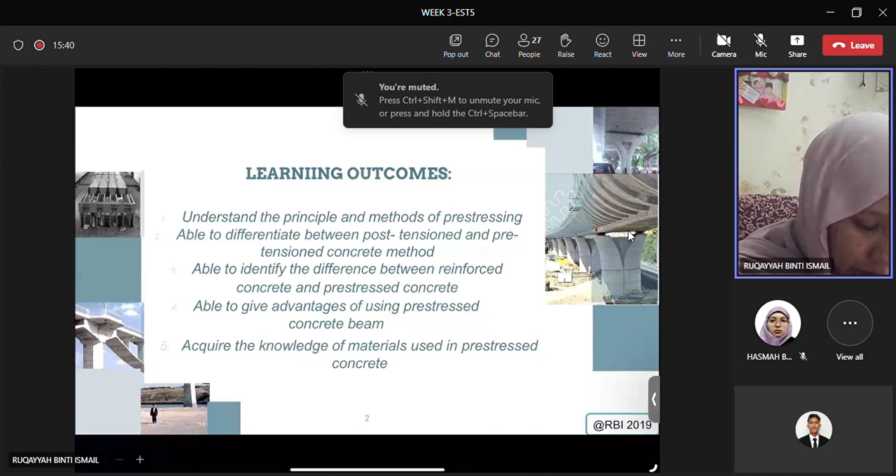And fifth, acquire the knowledge of materials used in prestressed concrete. Okay, so just a word of wisdom today: the first step in knowledge is to listen, then to be quiet and attentive, then to preserve it, then to put it into practice, and then to spread it. This is by Sufyan Ibn Uyainah. You can take that down as notes.

So first we start with what is prestressing. When we talk about what is prestressing, we go to the word stress. Stress is equal to P over A, where P is the load and A is the area. So it means the applied load to the area, you apply one load to the area. That is what we call stress.

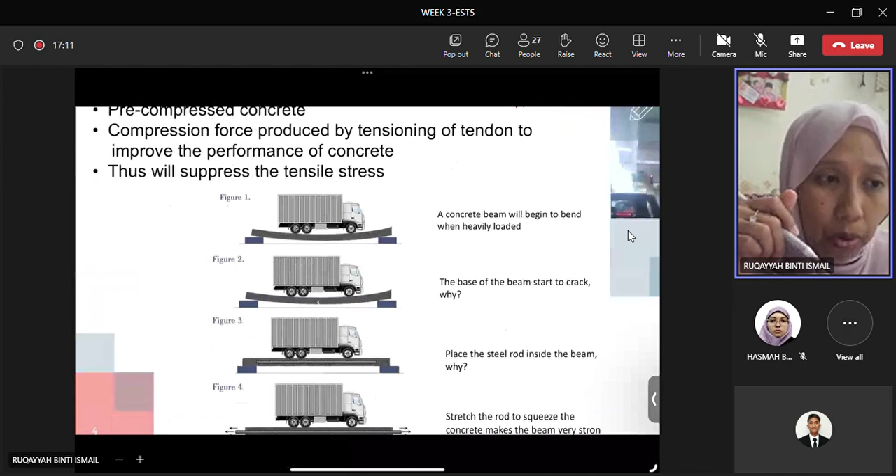So when we say 'pre', it means it is pre-compressed, meaning it's pre-loaded. Pre means before it is being loaded. So in terms of pre-compressed, it means it's being preloaded. What does it mean? I always like to take this figure as a reference.

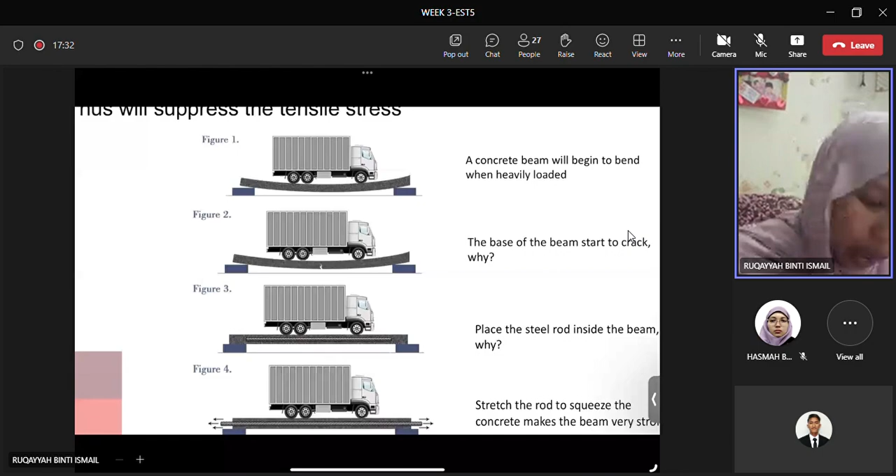We say that compression force is produced by tension and tensioning of tendon to improve the performance of concrete. This will suppress the tensile stresses. Basically, say you have a beam, and you have a truck on it, it's being loaded. When the truck is on the beam, you can see that eventually a crack appears after some time. The crack will deflect. Obviously, when the truck is first placed on top of the beam, the beam starts to deflect, and over time, the deflection of the beam will cause this crack.

So what will you do to improve the beam, so that it will not continuously deflect and the crack will not get worse? We will place a steel rod inside the beam. This is the steel rod.

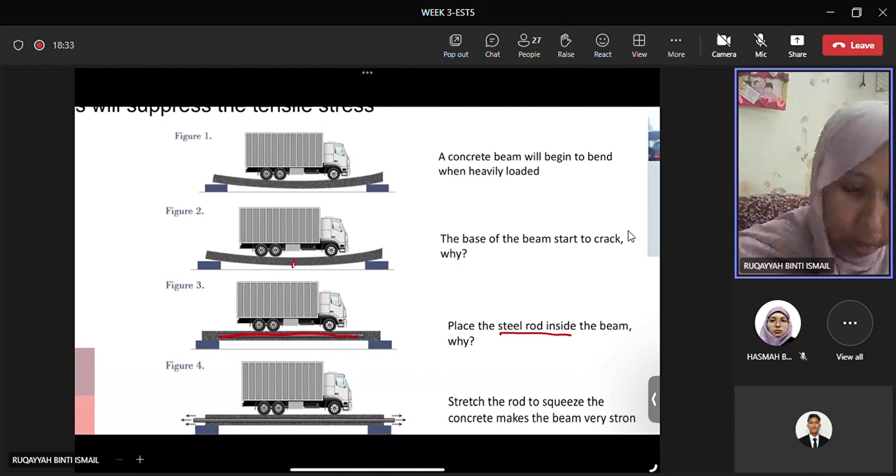So once you put the steel rod inside the beam, you'll be able to avoid the beam from deflecting. Okay, so when you pull the tendon or the bar, the steel rod, it will make the beam much smaller, stronger. It's like you are pulling it to tension it.

Okay, I'm looking for a paper. Just a paper, just so that I do the... okay. So have it.

Okay, so when you remove the truck or the lorry, what will you see is, for example, that you already pull the beam, pull the tendon inside the beam. So the beam is actually under tension. So once you remove the truck, what you can see is the beam will hog, it will rise up. This is the concept of prestress we are talking about, because when you pull the tendon inside the beam, you are strengthening the beam, until when you remove the truck, your beam will hog like this.

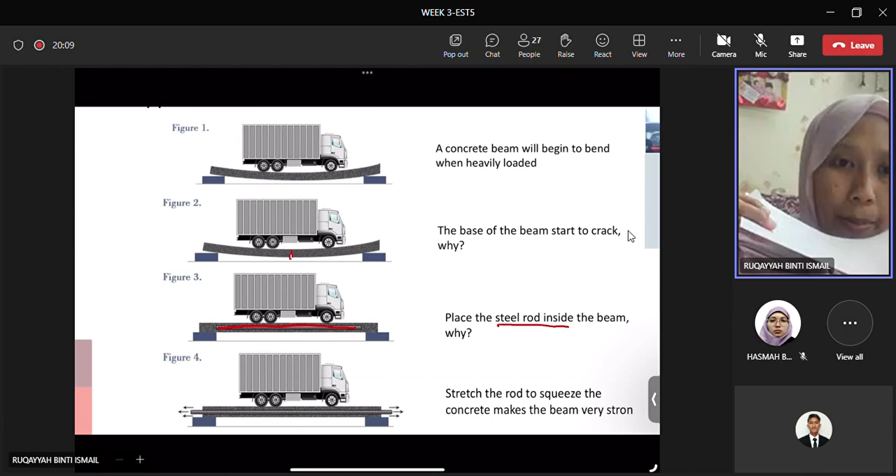So when you place the load on top of the beam, the beam will flatten because you compress it. So the flatness caused by the thing that you put on top of the beam will not cause the beam to deflect anymore like before, because your beam already has a tendon that has been prestressed, and the original state of the beam is hogged like this. After being prestressed, the original state of the beam will hog. So when you place any load on top of it, it will be flattened, not deflect like the previous figure you saw.

Okay, everyone? Do you get the principles of prestress? Clear, Zahira? Doctor. Right.

So this is very important. Always, when you want to explain the principle of prestress, try to imagine this figure. Try to imagine the beam, and then you have the truck. What will happen to the conventional beam? It will deflect and eventually it will crack, right? Then what do you do to strengthen the beam? You put the rod inside. When you put the rod inside, you're able to strengthen the beam so that it will not deflect. But if you pull it, apply force to your tendon, you kind of pull the beam itself as well. So then you're providing extra strength so that it will pull up your beam when you release the load of your truck. That's the principle. Hopefully everyone gets that.

Okay, the advantages of prestress. Why, my... hold on, I forgot to change to the hotspot. Why are you listening? Not that. Yeah.

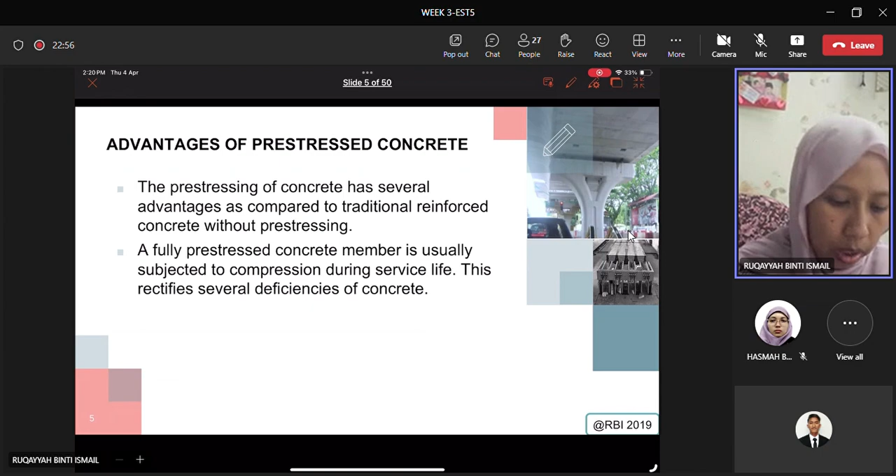Okay, all right, next we go to the advantages of prestress. So basically if you make a comparison between prestress and the conventional method, which is the traditional method, you can see there are several advantages. So basically for full prestress, they will experience compression during their service life. This of course will cause some deficiency if you didn't apply the right procedure to it.

The first advantage is the obvious one: the section will remain uncracked under service load. That's the first one. Because they already strengthened the beam. So when we design prestress, we design so that the prestress beam will not deflect. When the beam doesn't deflect, you minimize the risk of the beam cracking.

So once you're able to minimize the risk of the beam cracking, at the same time you could reduce the tendency of steel corrosion of the bar. Why? Because any crack in any beam will create some gap, create a hole. This hole will be easily penetrated by water, which will seep through all the cracks and holes, and then get into the steel bar. Once it gets into the steel bar, it will initiate corrosion. So things like that we need to avoid.

And secondly, increase in durability. Whenever you're able to reduce the corrosion and reduce the crack, of course the durability of the beam automatically will increase.

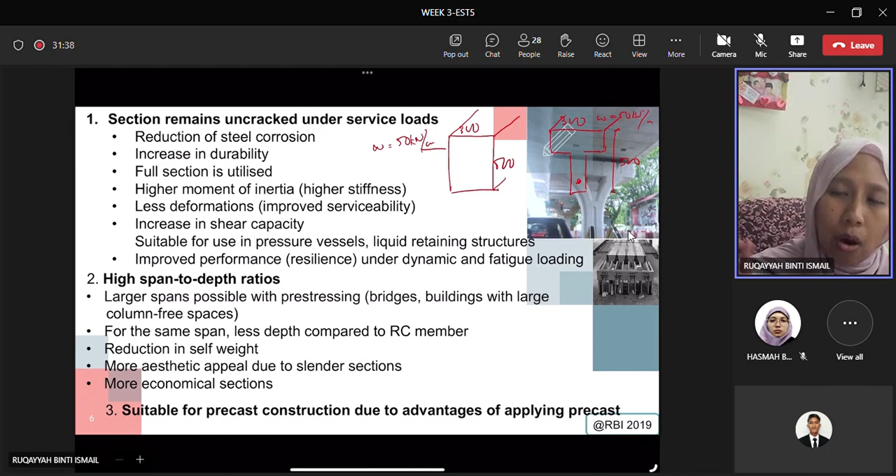Lastly, there's a more economical section, which provides good economical growth to the country.

Third, it's suitable for precast concrete construction due to advantages of applying precast. I always say most precast are pre-stressed, but not all pre-stressed are precast - we can assume precast is always going to be pre-stressed, but not all pre-stressed are precast. So pre-stress and precast always go together.

Now we have the disadvantages of pre-stressed concrete. Pre-stressing needs skilled technology, hence it is not as common as reinforced concrete design.

Second, the use of high strength material is costly. One thing about pre-stress is you need to use high strength materials - you cannot simply use concrete grade 20 or 35. Why? Because for pre-stressing, you need to apply tension to the tendon, so you need certain forces applied to the tendon so it can produce the stress. You need to pull, which requires skilled technology and workers, meaning you need to pay more.

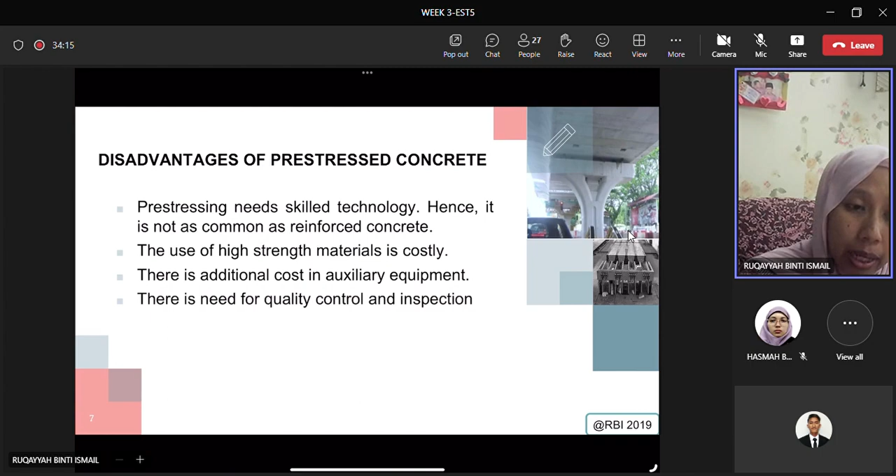Now we go to the materials.

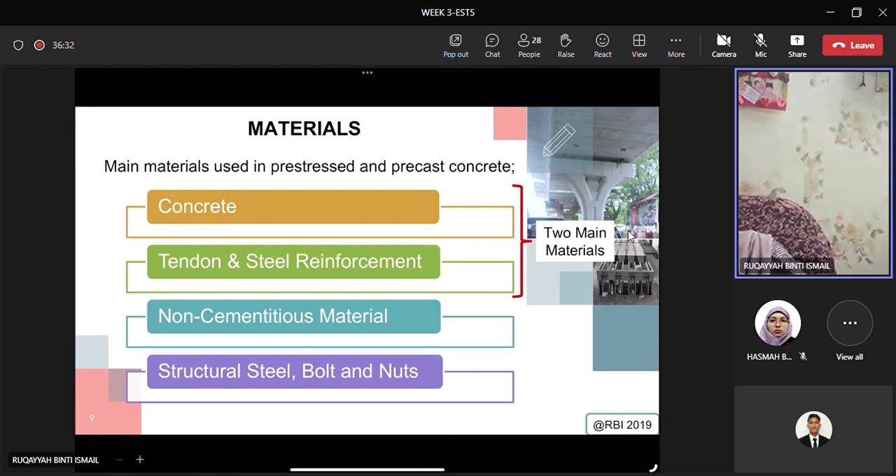Okay, alright, let's continue. So we're talking about materials. There are 4 materials that we commonly use, commonly used in prestressed concrete, talking about the prestressed concrete context. First will be concrete, which is the common one, the main ingredient is just the concrete.

Second, tendon and steel reinforcement. Third will be non-cementitious material. Fourth will be steel, structural steel bolts and also nuts.

Alright, so talking about concrete, concrete requires higher concrete grade. So we talk about this, meaning that if you want to use for prestress, you need to use concrete higher than 40 MPa. It cannot be lower.

But then there are, depends on the class. There are some classes allowed, there's some not. But if you're following the guideline from PCI, it will be minimum 40 MPa, to accept stress and also distress.

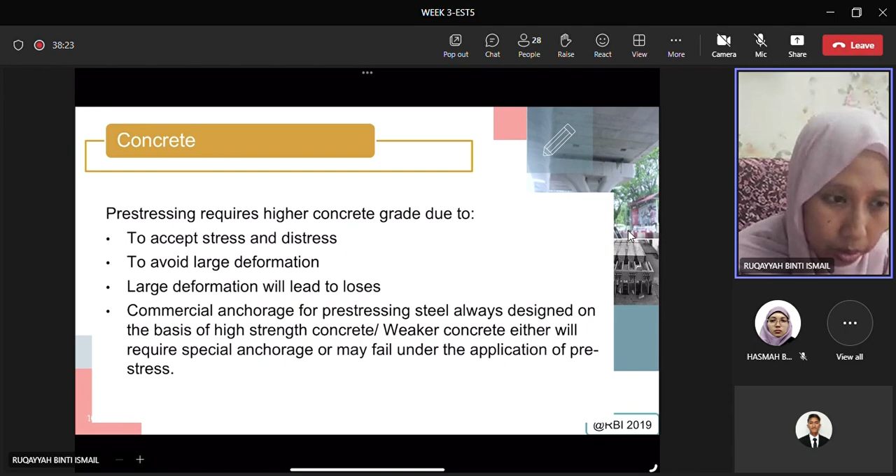So therefore it's very crucial to identify the strength first. For example, we have minimum concrete strength, so it's between 30 to 40 for each of the methods.

Alright, and we have minimum concrete strength at transfer, which is fci 25 Newton per mm square, for pretension and also post-tension. But of course this doesn't bound to this information because we still hold to the thought that pre-stressed concrete has to be minimum 40 MPa.

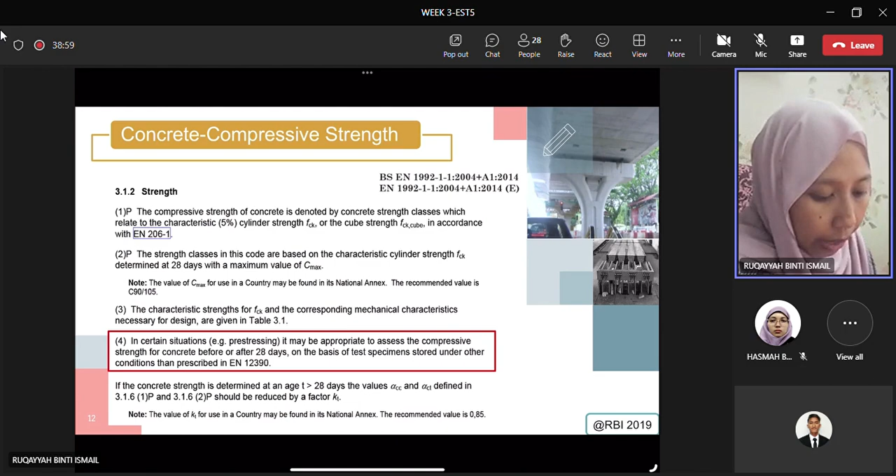Okay, so this is the strength. I don't want to go further like this one, you can read it. So the strength in the class stated, and then this is the tensile strength. So all this you can get the value from table 3.1, and this is the elastic modulus strength, the ECM values.

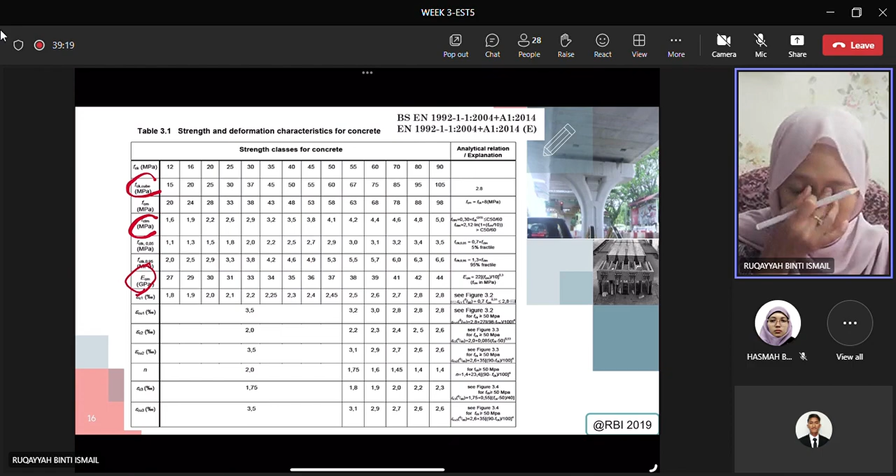Alright, so this is the table that you're going to use quite often this semester. So you will have the strength. For example, you take the strength as 40, so you go drag down. So what you can see here, 50 will be what we call

fck,cube for the cube. So you have the top one for the cylinder, the bottom one is for the cube. And you have the FCTM, which is the tensile strength of the concrete, and you have ECM, which is the modulus.

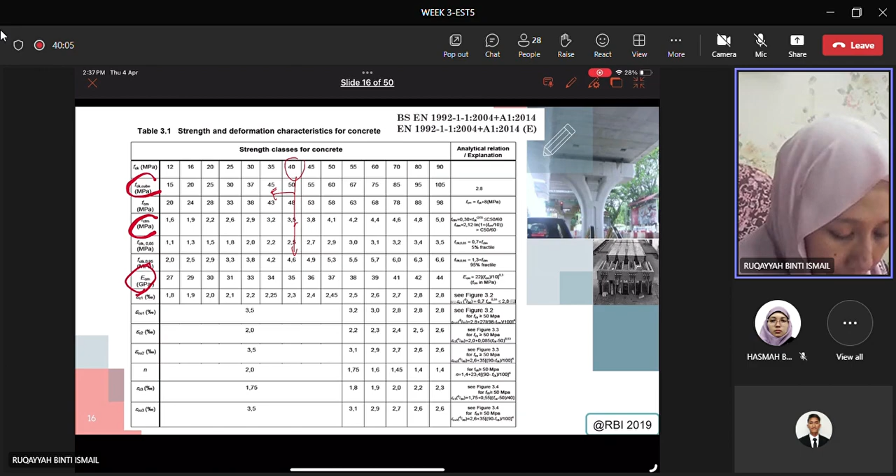Alright, so in terms of this, you will see the input data, because here is all being compiled and then given separately to others. Alright, that's about the table.

So now we go for the tendon and steel reinforcement. Alright, so when you have pre-stressing, we apply both.

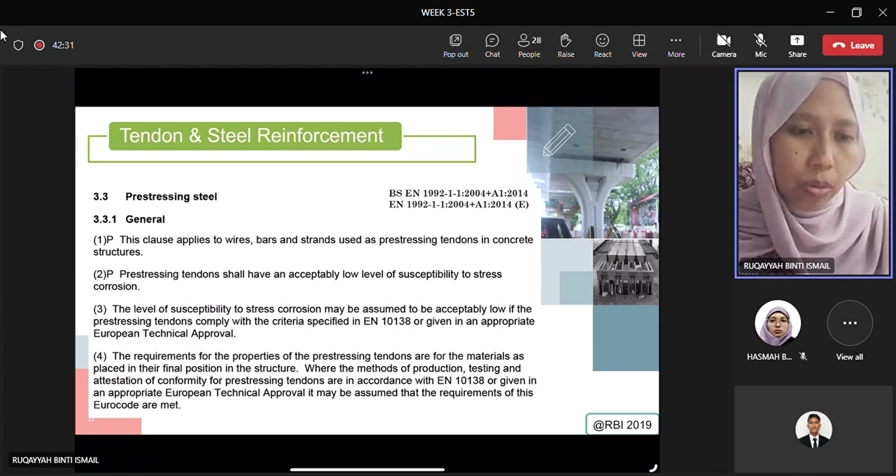Alright, sorry for the interruption. Okay, so then we have pre-stressing steel. For pre-stressing steel, we are referring to the code, to the design code. There's a specific clause mentioning pre-stressing steel, and we can categorize the pre-stressing steel into 4 types.

So first we have what we call a wire. Wire is made of a single, made of the steel, so normally the diameter will be a bit smaller. So then we categorize it as a wire.

Then we have what we call a strand. Strand consists of multiple number of wires in one strand. So then we have one strand.

Then we have bars. Bars can also be used as a tendon, where you use the bars with a certain diameter, and then you pull it, and then it will act as a tendon. And we have what we call a tendon itself.

So by definition, one tendon consists of a group of strands. So that means the multiple numbers of wire inside one strand, right, so we have that which is called one tendon.

But somehow in pre-stress, especially we want to differentiate between bars, we want to differentiate between reinforcement bars that is not tensioned and the bar reinforcement that is tensioned. So reinforcement bar that we use to pre-stress, or that you pull, is normally what we call a tendon.

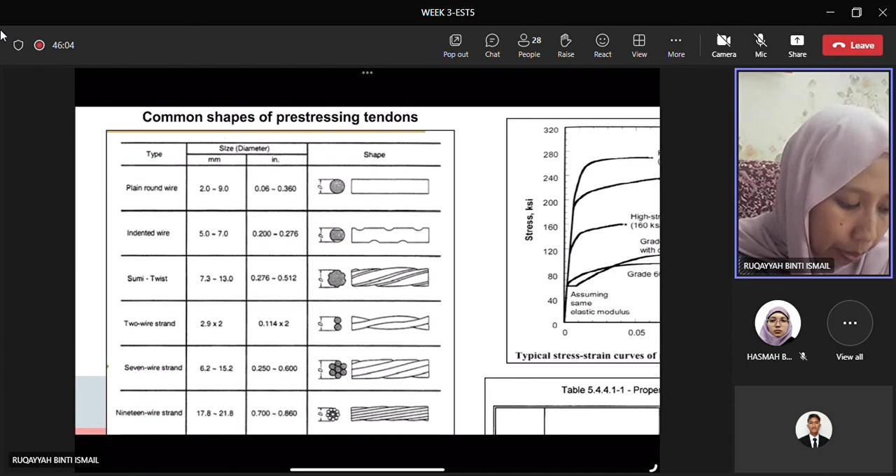If you look into the details, you have size and diameter, and also in terms of shape, so many types of shape. Even the wire itself, normally the wire diameter is going to be 2mm to 9mm, commonly 7mm, or could also be up to 13mm, so it really depends. This one, here will be 7 wire strands, meaning the diameter is equivalent to 6.2 to 15.2. So all that gives you the details of what type of materials you're going to use for your tendon.

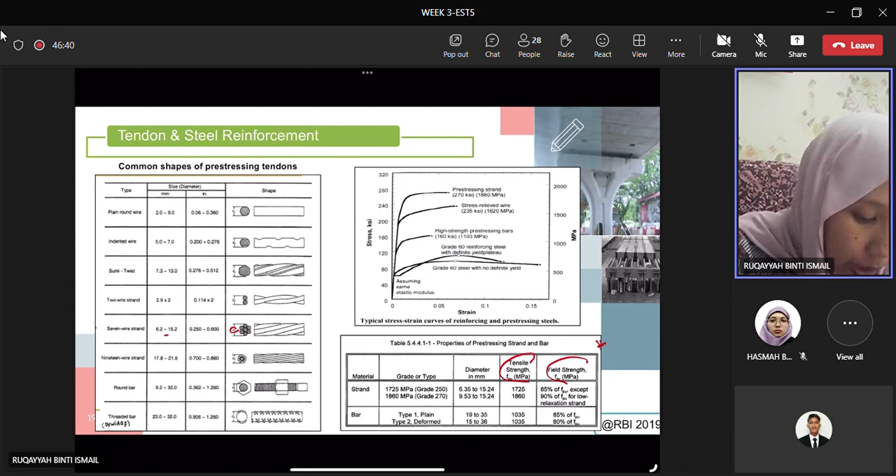You could also find this kind of table which gives you the materials, the diameter, the tensile strength. This value of tensile strength and yield strength are the two material values that are very crucial for you to be able to design. And this is also another example of the type of tendon that's available, so you can refer to it.

Boleh everyone? Is there any question, Rosnani? Okay, who else? Hi Sarah, soalan? Tak ada, doktor. Okay, Atiyah okay? Okay, doktor. Umar? No question, doctor. Alright.

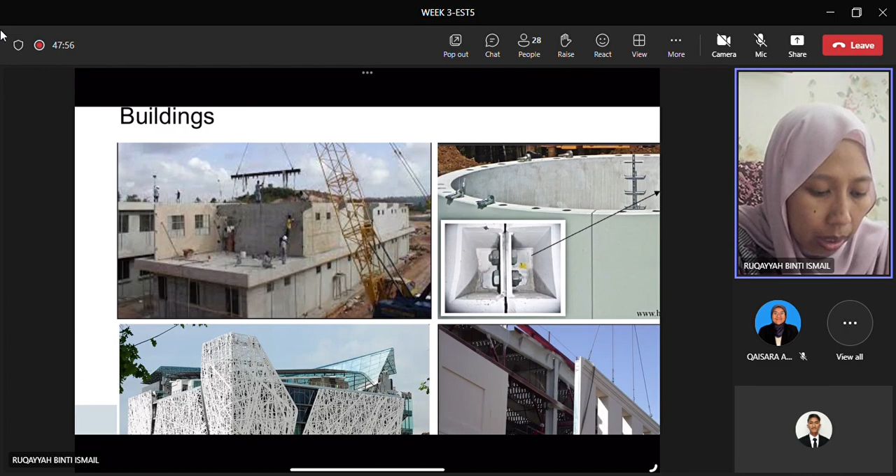Okay, hopefully everyone is clear. Now we go by application. So prestressed concrete, where is it being used? Commonly used in buildings, underground structures such as tunnels, towers, water storage, offshore structures, numerous types of bridge systems including cable stayed and segmental bridges, and also nuclear reactor vessels use pre-stress. In a way we can say it doesn't matter what type of structure, it just matters whether it can utilize the technology of pre-stress or not.

If you look at the picture shown here, this is kind of like one piece of wall with a hole. This is what we call precast. When we say precast, we say that all precast are pre-stressed, so in a way it's a pre-stressed element as well. You can see the crane lifting one element to another to place it at the exact location that they need.

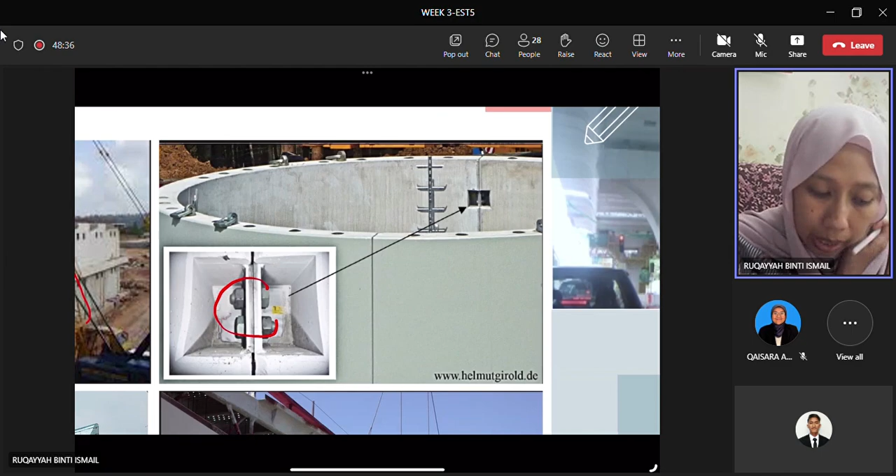And this is an example of what we call structural bolt and nut. Oh, I forgot to mention about something - the two other materials. Talking about bolts and nuts, kan?

So as we go for these four, you know that concrete and steel are compulsory. Non-cementitious material could be like grout, or any cement render materials used for rendering surfaces and so on. So grout is used to fill up any gap, and we call it a non-cementitious material. Then the last material we use is structural steel, like bolts and nuts, as you see in the figure here.

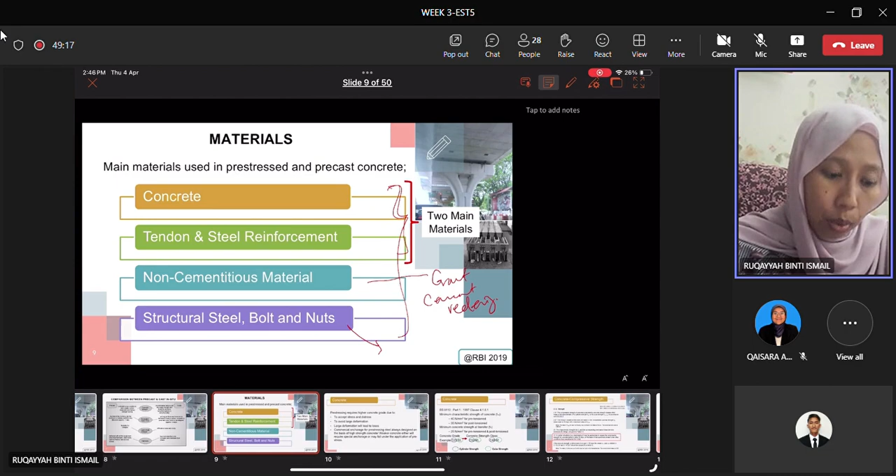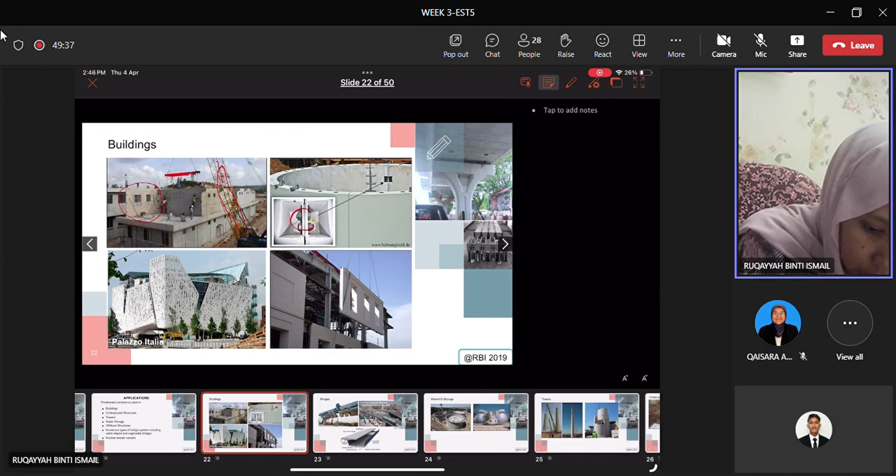Okay, so you can see the system of the bolt and nut there. All right, so here you can see how they lift this piece to the construction by using the crane.

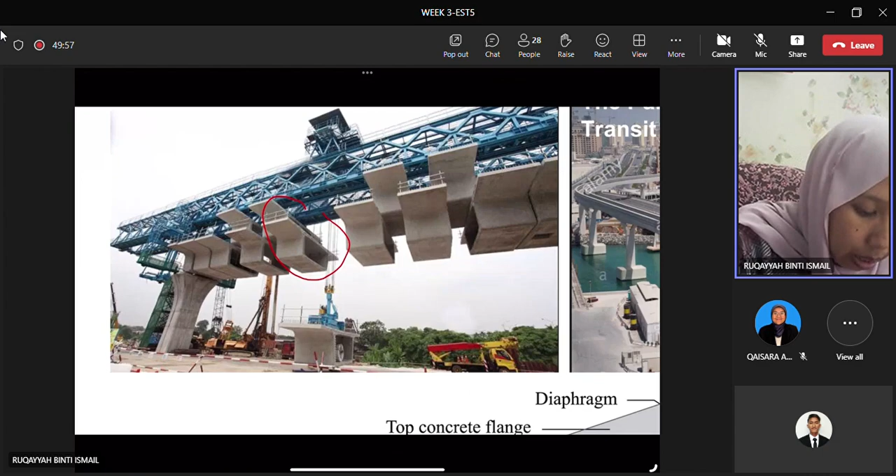All right, so then you have bridges, and you have segmented bridges. Bridges normally come with segment elements like this. You see that this segment is actually hollow, a hollow part. Just imagine if this were a conventional method, you would have to use a solid segment instead. By using a solid segment, of course the weight would be increased.

And then of course the beam weight increase, then your pier here will also increase, your foundation also will increase. So it's going to be a very huge structure.

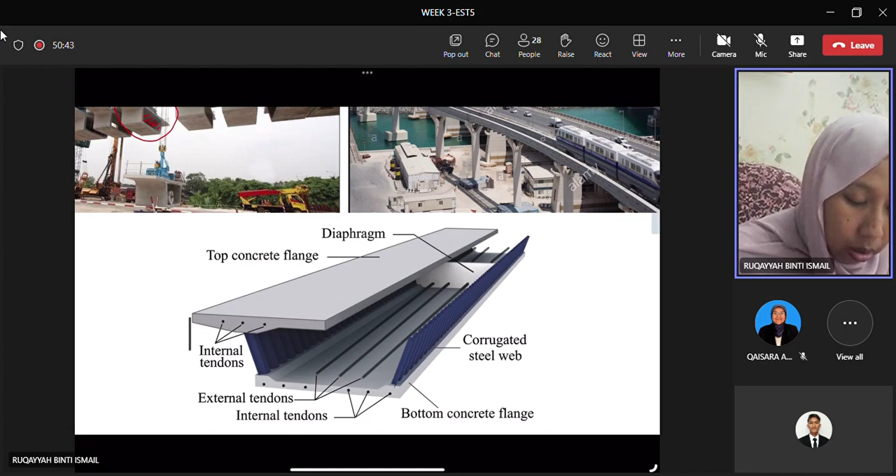All right, so this is an example of a detail of a segmented bridge element. You have the diaphragm to hold the tendon for the external tendon. You have the internal tendon, so you have corrugated steel web, the top flange and all. So it gives you the idea that precast for segmental are mostly all pre-stressed.

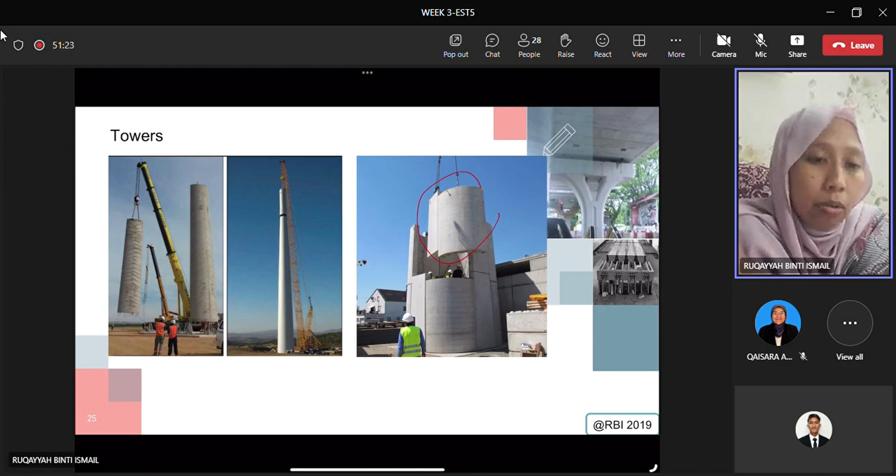You can imagine that it's not cast in the whole length at the factory, but they cast it piece by piece, and then they bring it to the site, connect one element to another element and make it into a tower.

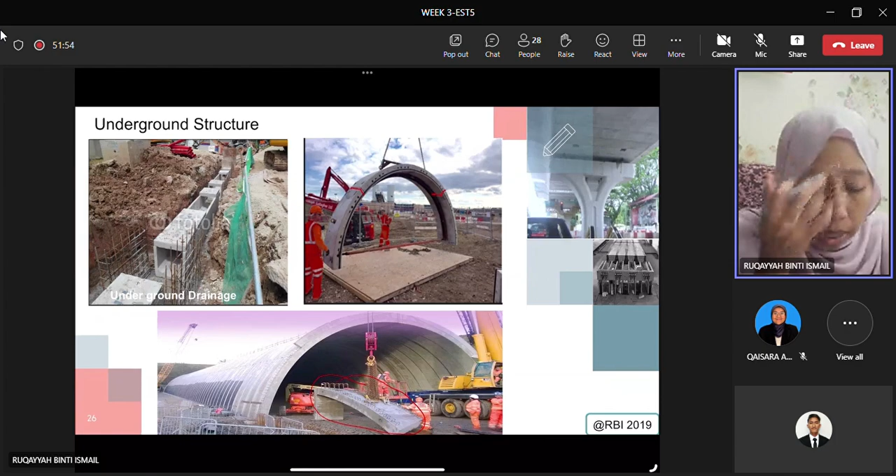Okay, and of course, in terms of the other things, you have to be careful.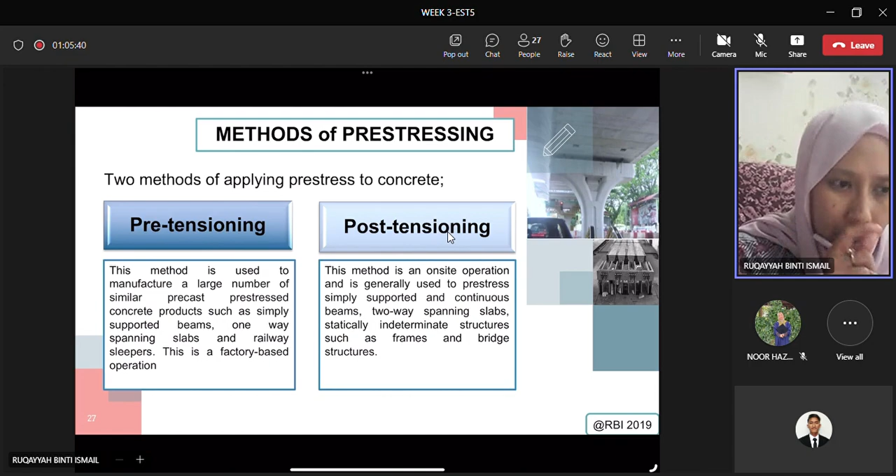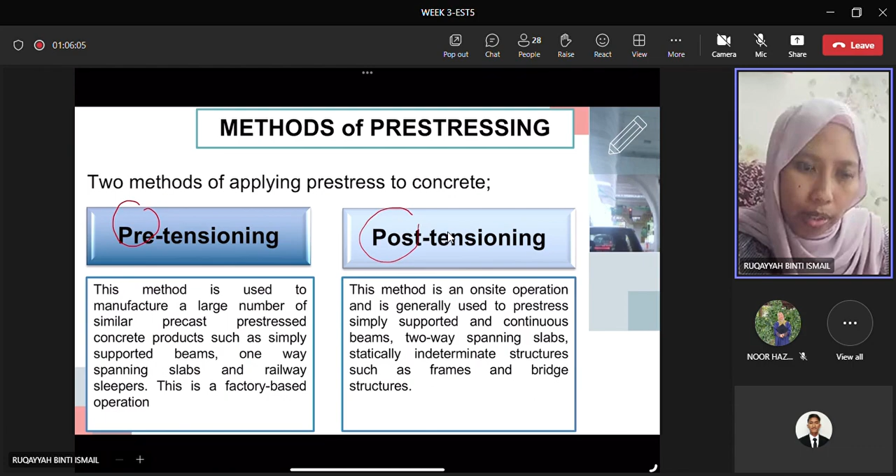First method is called pre-tensioning. Second method is called post-tensioning. Pre-tensioning is whereby we have, okay let us go to the words. The difference between these two methods is the word pre and post. So the main question here, pre means before, post means after. So it is before what and after what? Hold on to that thought.

This method is used to manufacture a large number of similar precast pre-stressed concrete products such as simply supported beams, one-way spanning slabs, and railway sleepers. So this is a common factory-based operation. Once it says it's a factory-based operation, automatically we know that it is a precast element. That's why we say most precast are pre-stressed. So pre-tensioning is a method that commonly we use, it is a factory-based operation.

And we have another method we call post-tensioning. Post-tensioning means after, so after what? Later we'll see after what. This method is commonly used on-site operation, like in situ construction site. It's generally used to pre-stress simply supported continuous beams, two-way spanning slabs, statically indeterminate structures such as frames and also bridge structures. So pre-tensioning is commonly factory-based operation, and post-tensioning is an on-site operation. Please take note of that.

Okay, so we go one by one. Before this, we take into account the word pre. So pre means before what? Before casting of the concrete. The word is before casting of the concrete. Alright, so how does it happen?

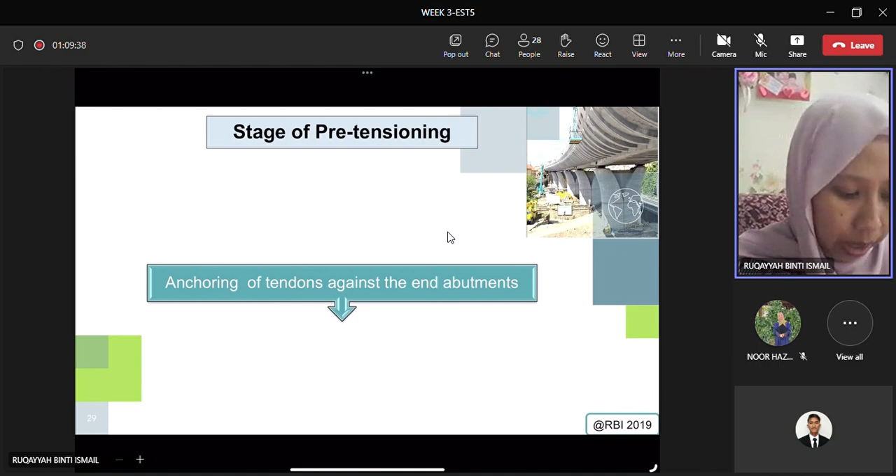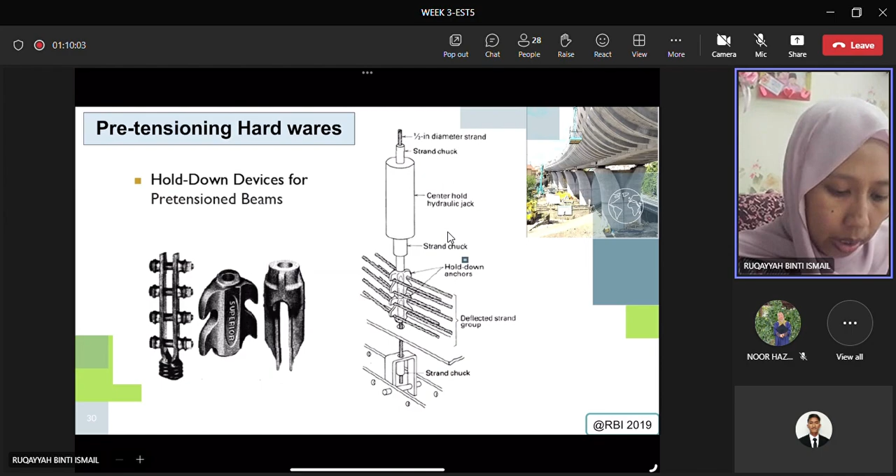So you have the anchoring of tendon against the end abutments. That is the anchor, meaning you want to place the tendon. Then you place the jack. The jack is the round circle where you pull the tendon. Then you apply tension to the tendon, meaning you pull it. After the tendon is pulled, you can cast the concrete, put it inside the bed. Then when it's hardened, you can cut the tendon out. Alright, so this is what we call the hardware of pre-tensioning. You have all these strands, the anchor, to hold down and so on.

Let's watch this video, shall we? This video doesn't have sound.

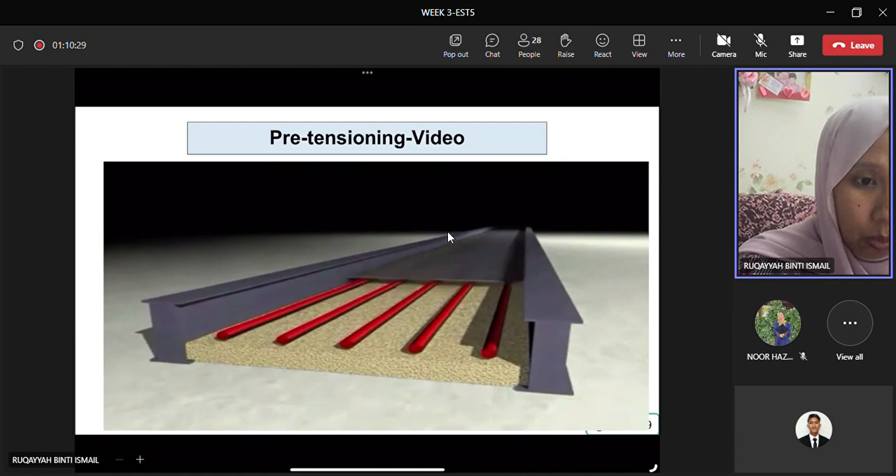Okay, you can see the bars. This is not a reinforcement bar, this is a heating bar. Heating bars are normally used in the factory so that we can heat the concrete and accelerate the time for the concrete to harden.

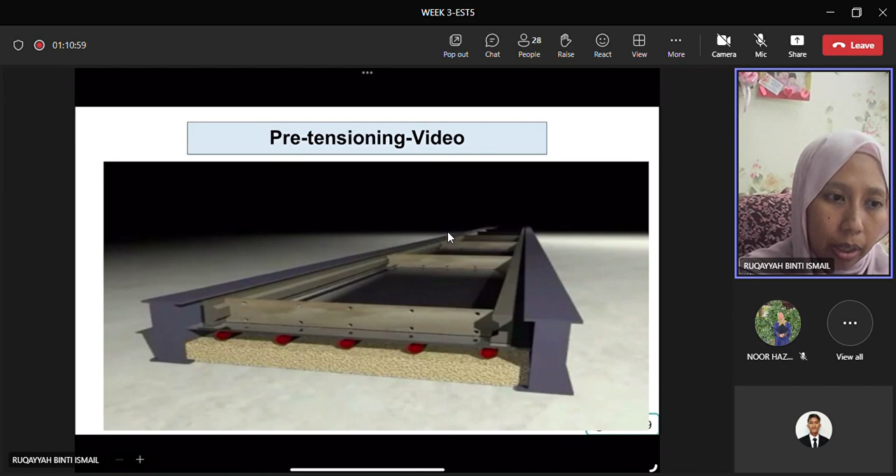So then you will place both molds, both sides. Then you place your tendon and interlock it. Then you slot in your wires. It looks small here, so probably it's a wire. Then you pull the wire.

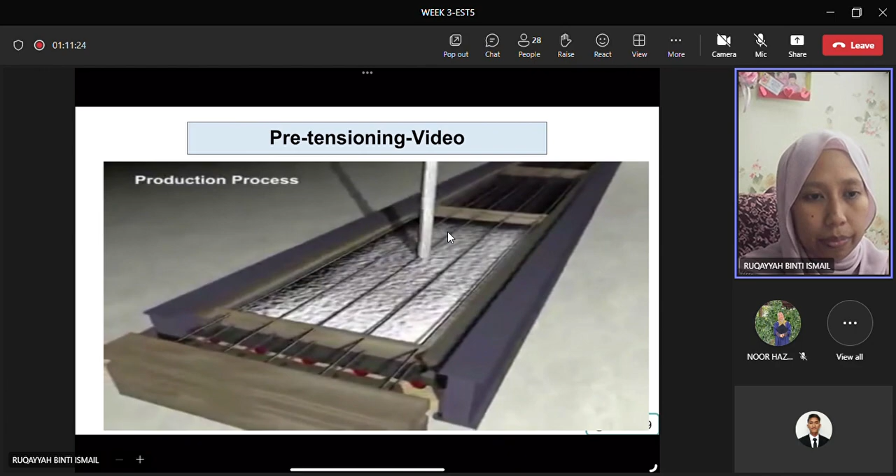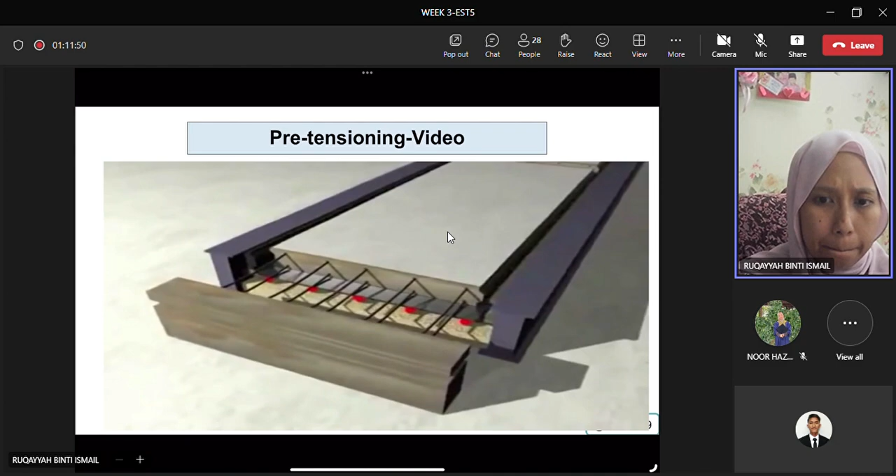Then you start to put in concrete inside and flatten the surface. Then you cover it so that you can heat the specimen so that your concrete will harden. You can see that it started to heat.

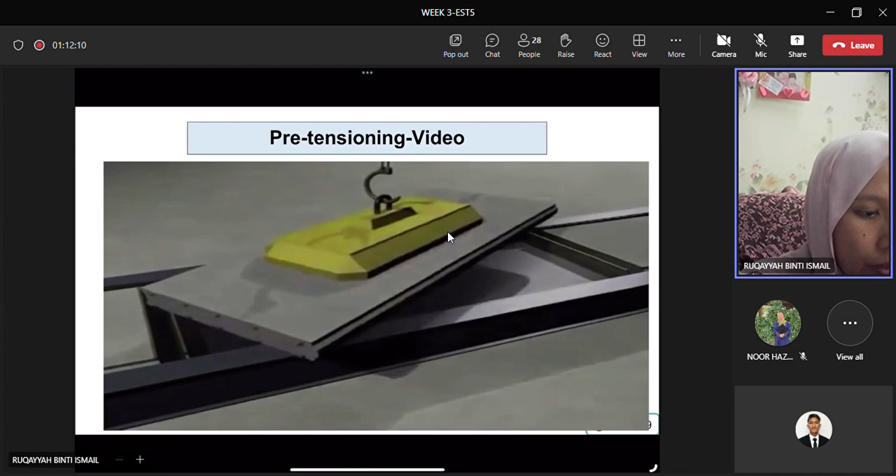Alright, is that clear for everyone? Clear? Zarifah? Zarifah, Zahida? Yes doctor, clear? Yes doctor, clear.

Okay, so that is one method, we call it pre-tensioning. Remember the word pre, so when we say pre-tensioning, it means the tendon is being pulled before, before the concrete, before the concreting. So the next method we have is post-tensioning. Post means after, after what? After the concreting, meaning you pull the tendon after the concreting.

So for post-tensioning, since we're going to cast the concrete first, we have to make sure—if you recall the pre-tension procedure just now, you pull the tendon, then you put in the concrete. So basically your tendon is already in the concrete, then the concrete hardens, so the tendon is kind of attached to the concrete.

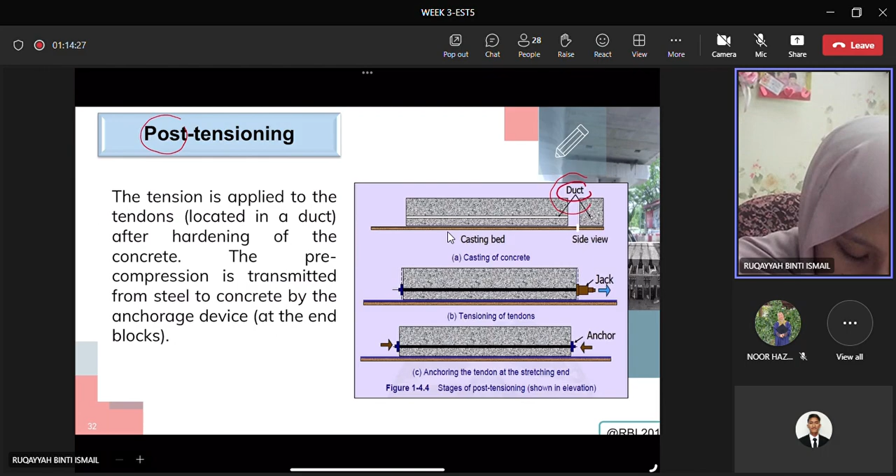Therefore we provide what we call a duct. So this is duct, the white one you see here is what we call a duct. Ducting is like a big pipe. It creates empty spaces inside your pre-stressed beam, and with that empty space you can slot in your tendon and pull it.

The tension is applied to the tendon located in the duct after hardening of the concrete. Normally you wait until it hardens, but it depends - sometimes you can put the tendon inside the ducting earlier, or after the concrete is hardened.

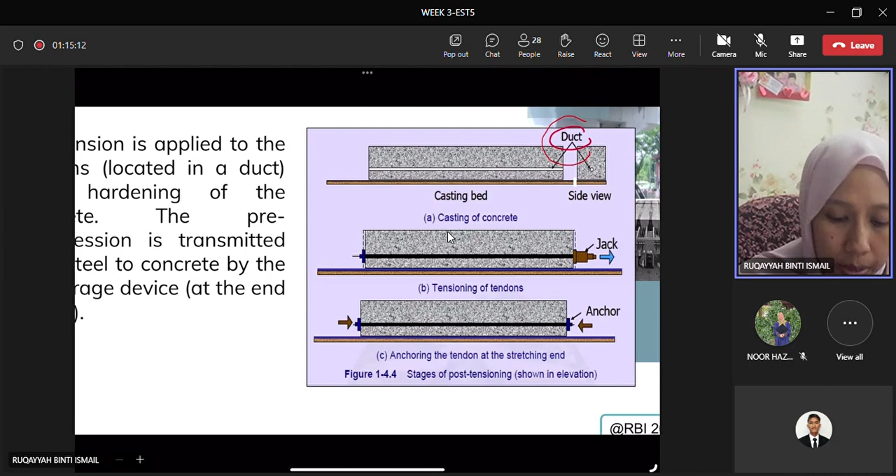Once it's in there and the concrete has hardened, you pull the tendon. After applying certain forces, you lock it by putting the anchor at both sides so it will not move when you release. If you release without locking, the pulling is useless - there's no point, because you wouldn't be able to capture the load, the strength.

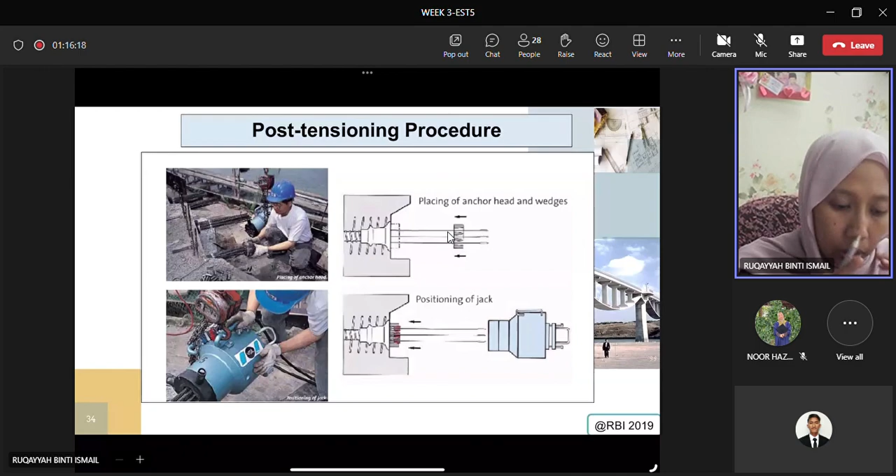You can see the procedure here. The guy is holding the anchor of the tendons - this is the slot in the anchor and also the wedges of the tendon. Then they position the hydraulic jack, which is able to pull the tendon by providing a certain pre-stress force.

Then you have what we call stressing, so you keep on pressing, and lastly they seat the wedges to lock it from any movement, from releasing.

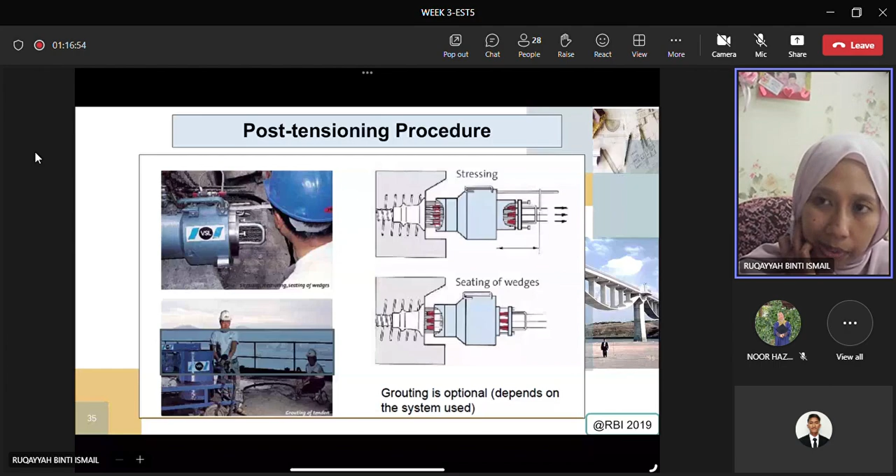Talking about hardware for post-tensioning, it's a bit more critical compared to pre-tensioning because it is not embedded directly with the concrete. After you pull the tendon, the movement is still there - you can see a gap between the tendon and the ducting area, because the ducting is hollow and the tendon must be much smaller than the ducting diameter, otherwise you cannot slot in the tendon.

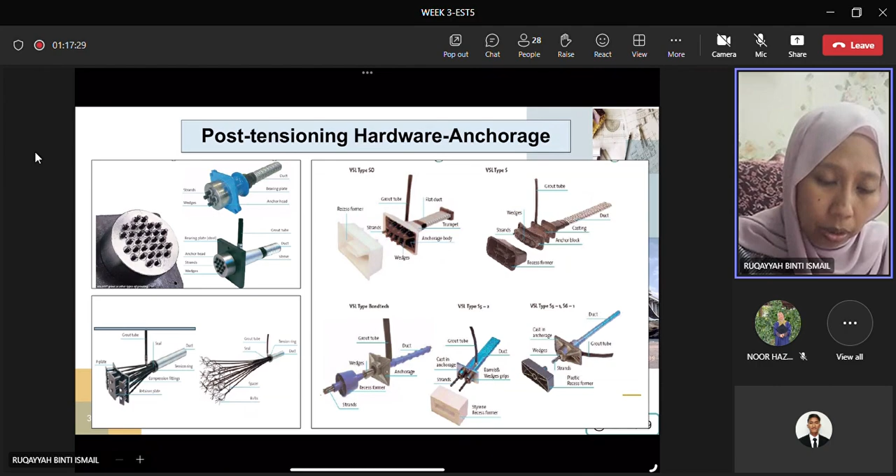So this is your ducting - this is what we call a flat duct, not a round duct. Ducting itself has many types; for example, this one is the type of round ducting, the circular one, like a pipe. So this one is flat ducting.

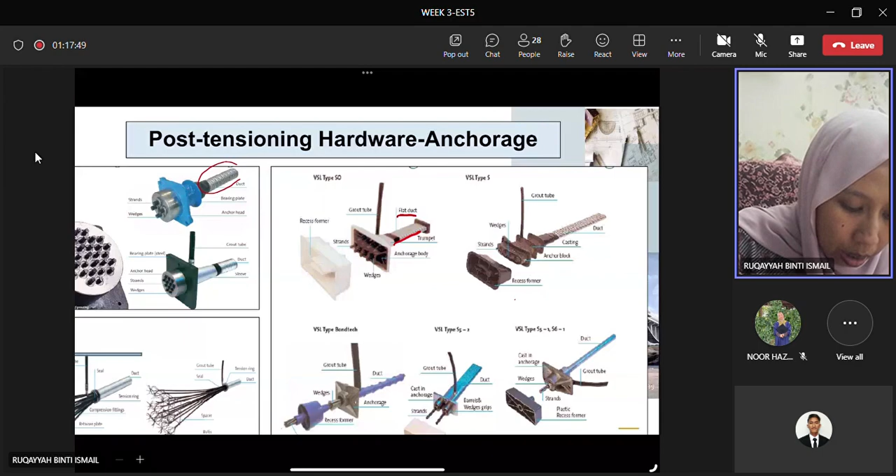This is the anchorage system that holds the ducting while you are pulling it using your hydraulic jack. You can see also, in each anchor, normally you will see this - this is what we call a grout tube.

So what is grout? Grout is a composition of cement - a special type of cement because it can reach a certain strength - water, and a bit of sand. Normally it's a ready mixture, just a special cement that can reach out a certain strength.

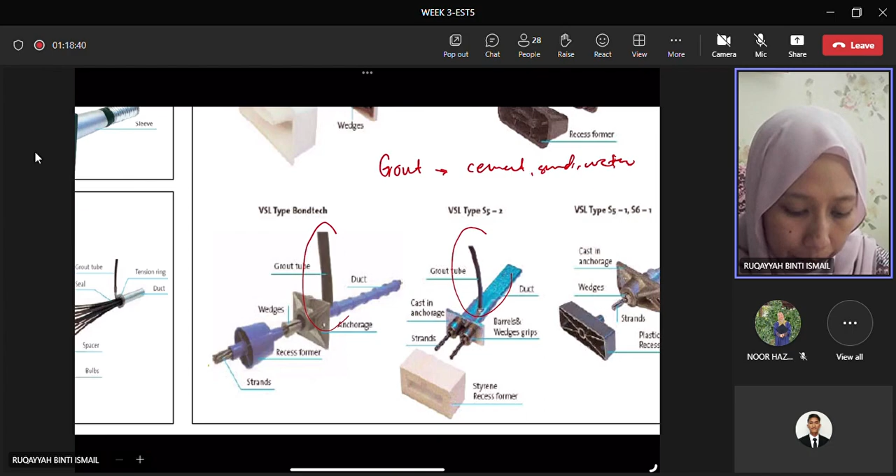Normally you mix the grout with water to get a liquid paste, then pump it into this tube, the grout tube. The point of pumping in is because there are two options for post-tensioning: either you pump in grout to fill the gap between the tendon and the ducting so the tendon cannot move, or you leave it ungrouted, meaning there will always be a gap between the tendon and the ducting surface.

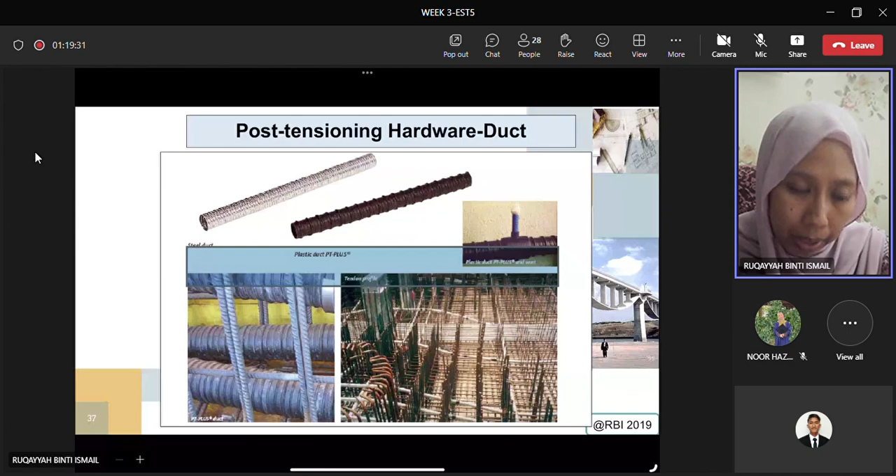This is the duct - you can see it's like a long piping, normally made of steel, or made of HDPE plastic and similar kinds of material.

Okay, so now let's go to the bonded tendon and also unbonded tendon. Bonded tendon is the option where, for post tensioning, you pump in grout. So the grouted post tension tendons are what we call bonded tendon, meaning the tendon is bonded directly to the prestressed beam because there's no gap.

The advantage is a large reduction in additional reinforcement requirement, as the tendon cannot de-stress in accident because it cannot move, it's already embedded in the concrete. The purpose of bonding is to provide protection for the tendon from any kind of corrosion. Now let's go to unbonded tendon.

Unbonded tendon is where there's no bond, meaning you didn't pump in grout. When you don't pump in grout, there will always be a gap between the tendon and the ducting surface.

But when you have a gap, there's a tendency or possibility of water seeping through holes, pores, or small cracks. They can pass through and cause the reinforcement or tendon to corrode. That's why when you opt for unbonded tendon, we normally coat the tendon with grease to avoid corrosion.

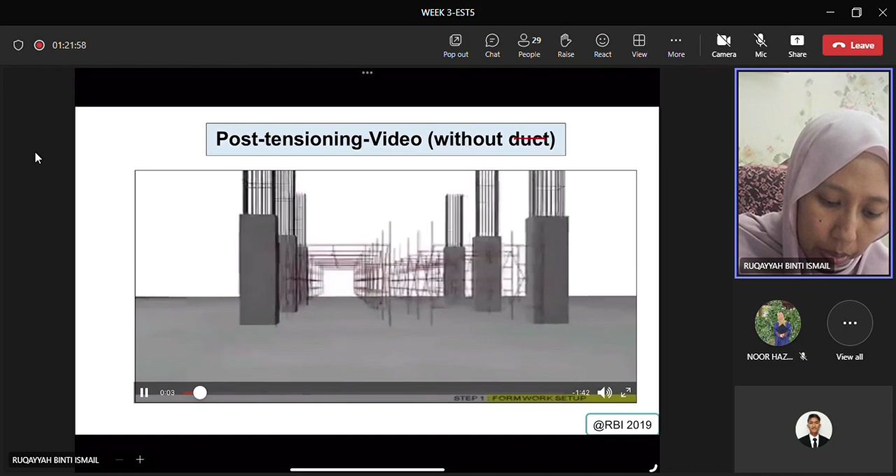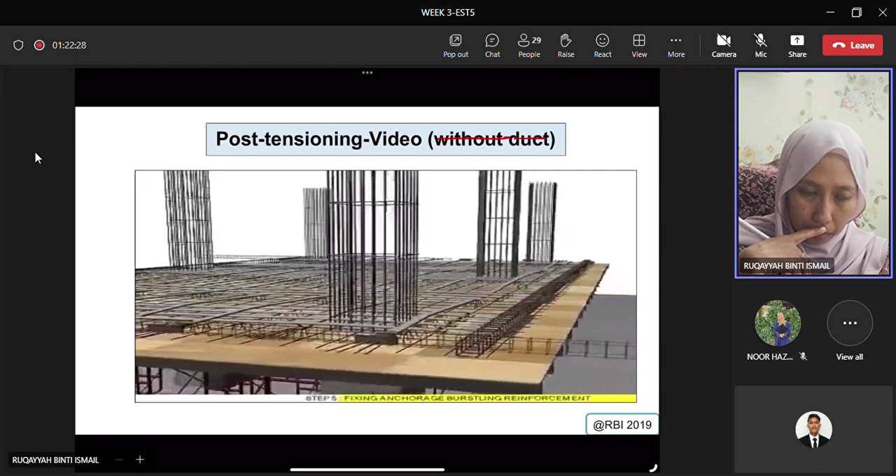Let's watch this for the post tensioning. Step 1: Formwork set up. Step 2: Placing of bottom reinforcement. Step 3: Fixing of bar chair for post tension tendon. Step 4: Placing post tension tendon. Step 5: Fixing anchorage bursting reinforcement. Step 6: Placing of top reinforcement. Step 7: Placing anchorage pocket former and grout vent.

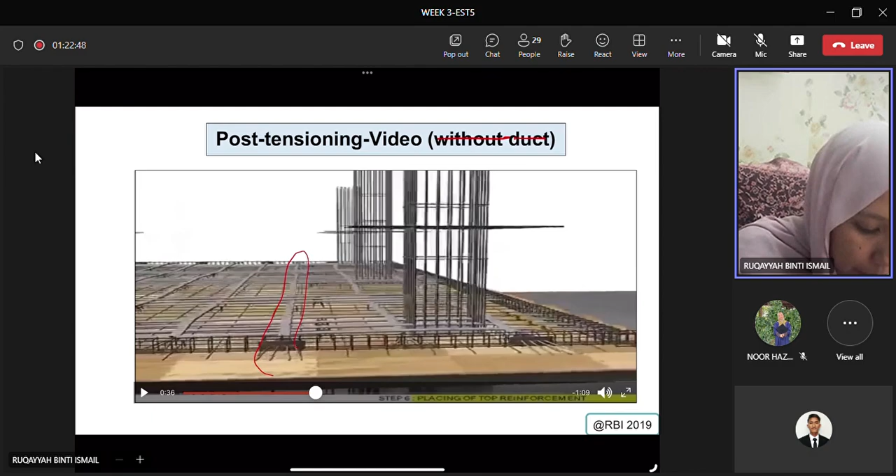Before that, I want to show you step 6 - this is the ducting, the flat ducting. They place the flat ducting. Flat ducting, flat ducting, placing.

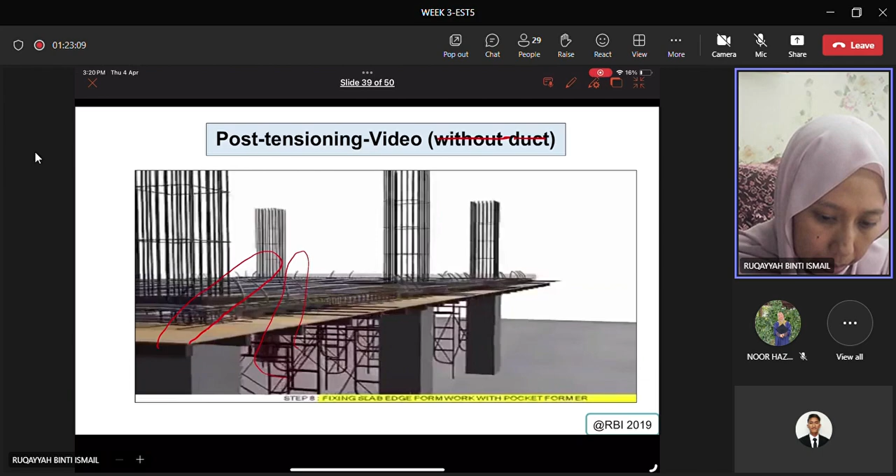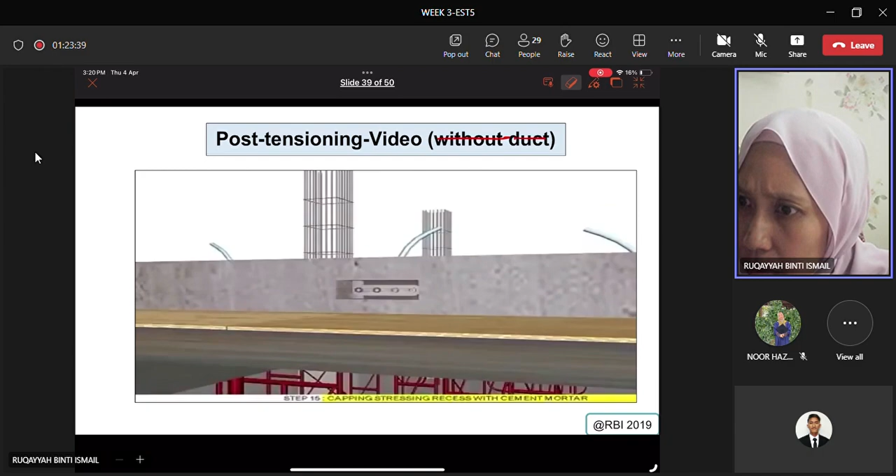Step 8: Fixing slab edge formwork with pocket former. Step 9: Concreting of slab. Step 10: Remove slab edge formwork. Step 11: Remove pocket former. Step 12: Placing anchor head and wedge in position. Step 13: Stressing. Step 14: Cutting end of strand. Step 15: Capping stressing recess with cement mortar. Step 16: Grouting. Step 17: Repeat for next 4 slabs.

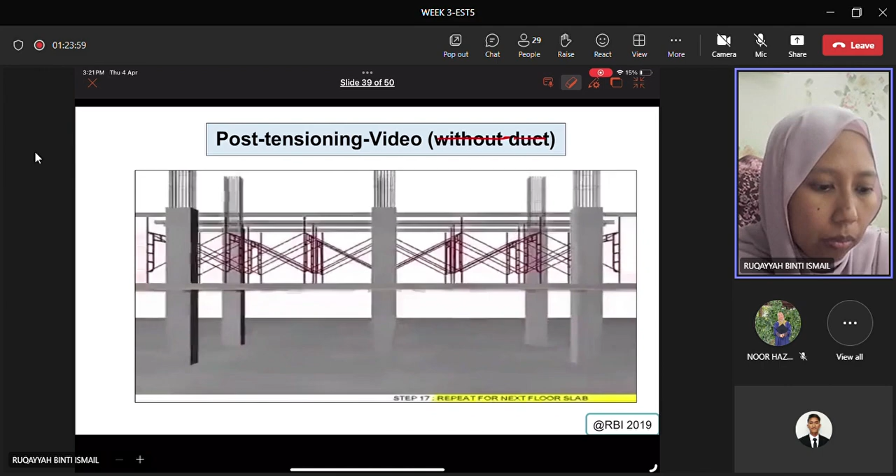Okay, wait, wait, I have some confusion. Wait. Wait, wait, give me a minute please.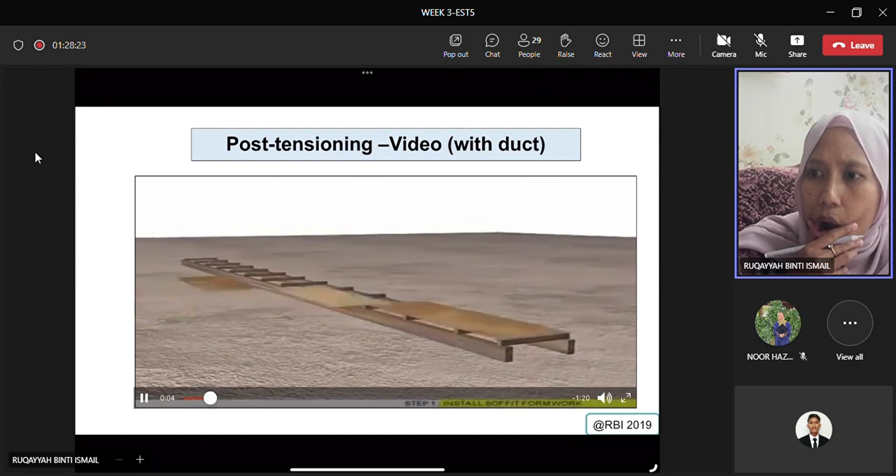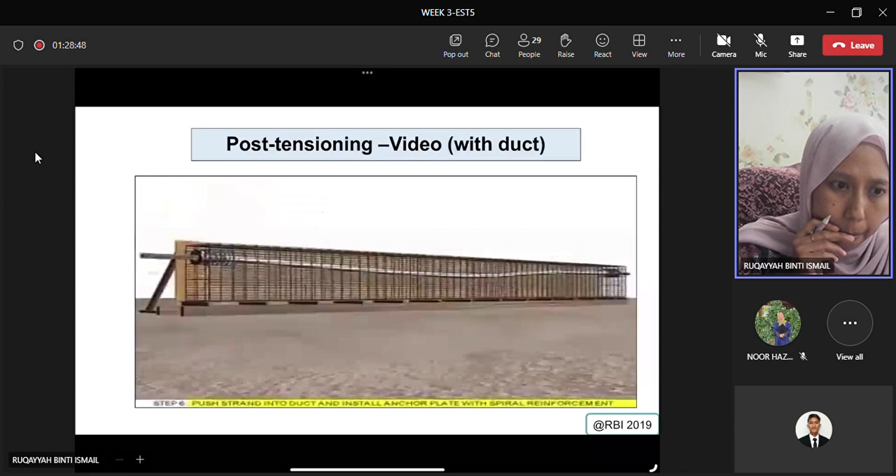Step 1: Install soffit formwork. Step 2: Install side formwork. Step 3: Install reinforcement. Step 4: Install bar chair for tendon profile. Step 5: Install duct. Step 6: Push strand into duct and install anchor plate with spiral reinforcement. Step 7: Complete install of every tendon. Step 8: Complete side formwork. Step 9: Complete end formwork. Step 10: Concreting.

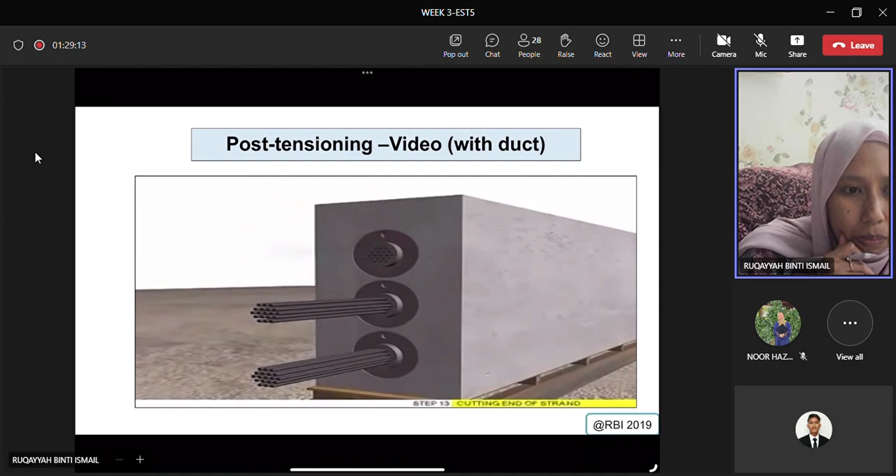Step 11: Install anchor head and wedge. Step 12: Stressing. Step 13: Cutting end of strand. Step 14: Install anchor grout cap. Step 15: Grouting. Step 16: Remove grout cap.

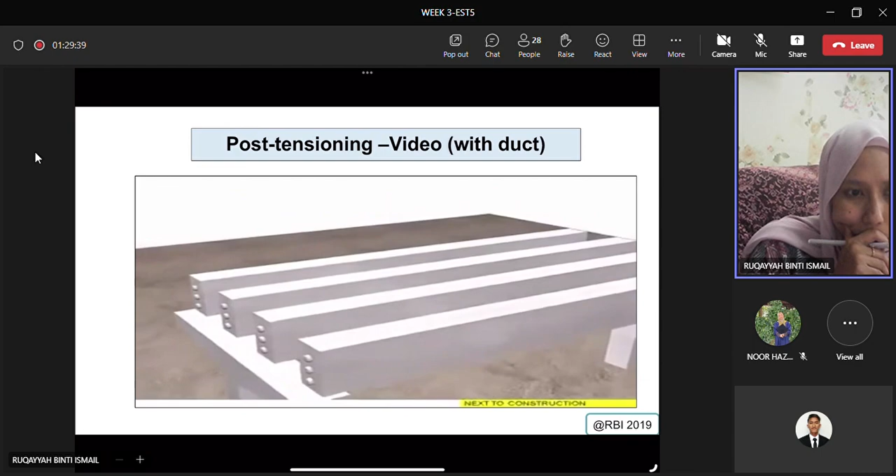Alright, I just want to highlight something interesting here. Did you see this one? You notice there's like a spiral here, do you see it?

That spiral is actually meant for end block design. Later we will learn end block design, whereby we provide spiral reinforcement to ensure that when you pull the tendon, it will not affect the concrete, because the distance to the hydraulic jack where you pull the tendon is quite close. So the concentration of force will be very concentrated at that length. Therefore we provide extra reinforcement just to avoid the concrete from bursting, from failure, from rupture.

Okay, now we go with design consideration. Design consideration is about what philosophy of design we use to design prestressed concrete. In terms of design consideration, we can make these two comparisons.

If you recall what you have done in your RC design, you design based on ultimate limit state. So what do you do? You calculate your W, your design load, and your W will be factored, for example 1.35 GK plus 1.5 QK.

So it becomes a factored load, meaning you allow some factor of safety. Instead of, for example, your W being GK plus QK which is only maybe 60 kilonewton per meter, when you factor it, it becomes almost 130 kilonewton per meter. So you design based on this, and when you design with 130, your size is actually over-designed.

Since there are always issues in terms of design, poor workmanship or poor materials, you allow your design to be over-designed so that if it fails, it will not fail immediately, because you've already extended the design load.

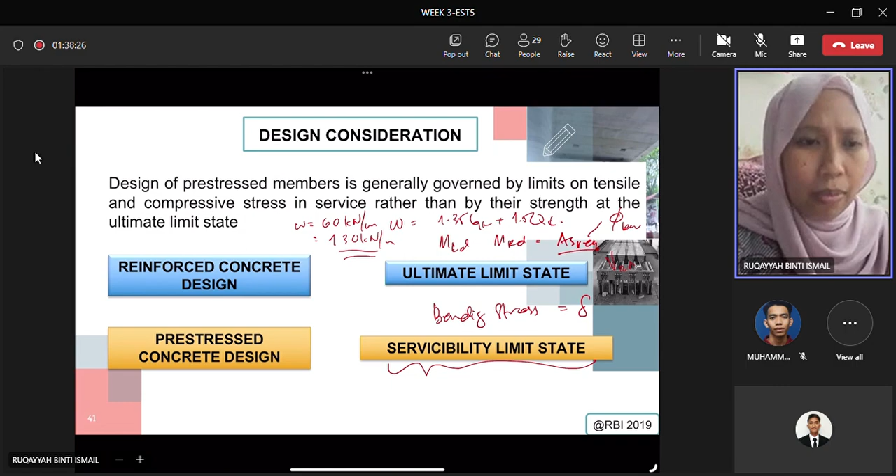Okay, alright. So the design consideration, if you're talking about class 1, class 2, class 3, it's actually more or less the same principle as what we have in RC. This class is represented by class 1, class 2, class 3, and we can say that class 1 and class 2 are meant for the serviceability limit state, where we design for SLS. And then we design with consideration of unfactored loads, and the deflection values and bending stresses.

But once we already design our prestressed beam, it means we already provide the number of tendons, the diameter of the tendon we want to use, the position of the tendon we want to use, and the force that we want to apply for tension. All that parameter we already know. So then we have to check for ULS.

Okay, we have to check for ULS. What do you mean by check for ULS? Means with all the parameters already set, you're going to use them to check for ULS. Means you're going to use the equation for calculating the moment resistance, moment design and so on. You will be able to calculate if it's okay or not, if the total moment is sufficient or not, if the tendon can carry the moment or not.

Because if the applied moment, maybe the tendon cannot carry all of it, there are some moments the tendon cannot absorb. So then you have to provide additional reinforcement. Means you need to provide reinforcement bar. But this reinforcement bar will not be pulled, it's not a tendon, it's just a reinforcement bar. This is normally what we experience for class 1 and class 2, whereby your tension will be equal to 0.

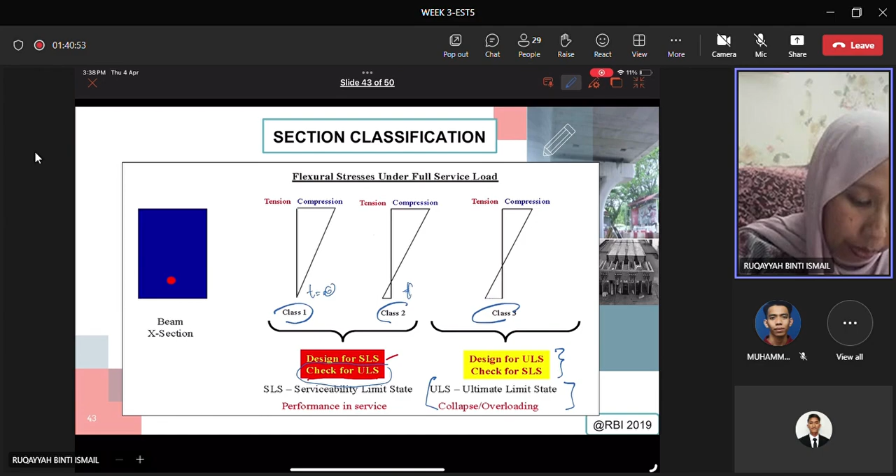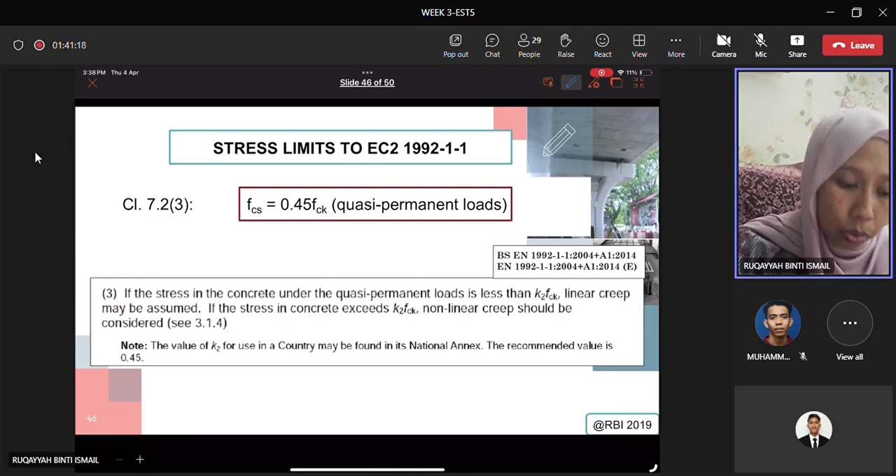This is just to show you the stress limits of the tensile stresses. FCT is 0.6, the FCS which is 0.6, FCK as well, which is 60%. You can read through, and of course you have for FCS for quasi-permanent loads as well. This one later we will go through in depth in a different topic, inshallah. And of course the stress limit of the National Annex recommended values.

Okay, so that's all. Is there any questions, soalan?

So far tak ada lagi, doktor. Okay, alright. Siapa lagi? Okay. Arif? Mana Arif Farhan? Ya doktor. Okay, boleh follow? Can you follow? Boleh. Right.

Okay, so I will stop here. I'm not planning to continue new topics because if I continue then I don't think I can finish on time. And then furthermore it's gonna be a long break for your Eid. So I think better we start next after Raya for the topic.

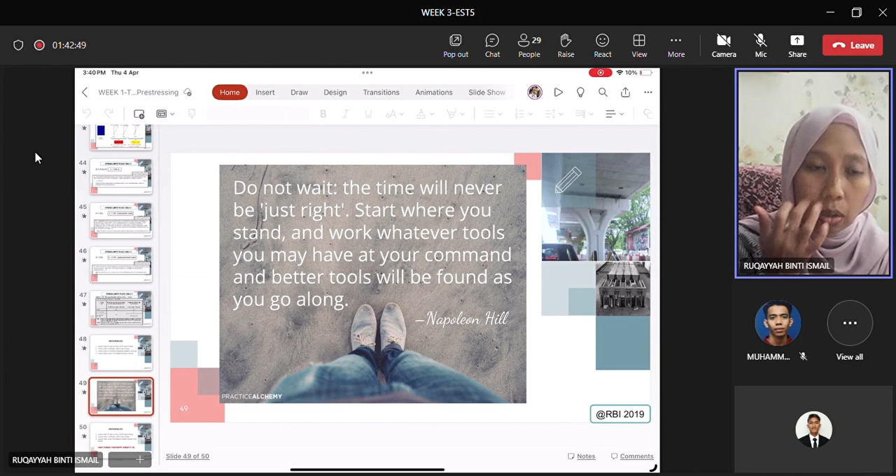And I will release you the exercise after this. So I expect you guys to use the time, because actually our time is supposed to be until 5 o'clock today, correct? Yes, doctor. Okay, so please use the time, the 1 hour time, for you to do the exercise that I will give. It's like a self studying, yeah.

That is for your class because it's a 3 hours class. So normally that's what I do. Kalau I buat lecture pun, I will be 2 hours lectures, and 1 hour more to discussions, or more to do exercise and so on. So if you have problems, then you can just simply ask me directly during the 1 hour. It's just matter of you have to do it on your own. You try yourself first.

But for this topic, it's not much exercise, I mean it's not calculation exercise. So please take your time, use the time until 5 o'clock, for you to complete the exercise. It's non-graded. The exercise, like I said, is non-graded. Saya takkan check pun your work, but because you are actually doing it for yourself, not for me.

Alright, so yeah, I think, is there any question before I end the session to distribute your exercise? Not assignment, your exercise. Ada soalan? No. Ada soalan? Tak ada. Ada. No, madam. Okay, good.

Ruhaiza ni Ruhaiza. Yeah. Okay. Semua dah tukar gambar? Ya. Okay, good. Ada juga yang saya tak dapat nampak. I don't know why. Saya kena klik nama satu-satu baru saya nampak. Zahida mana Zahida? Dah tukar gambar belum? Dah, Doktor. Saya klik tak nampak. Oh, maybe you kena log out nanti kot. Balkis pun saya tak nampak. You dah tukar ke? Balkis. Belum ada sebab hari tu dia problem. Nanti saya try balik. Okay. Jangan try sampai next sem sudah.